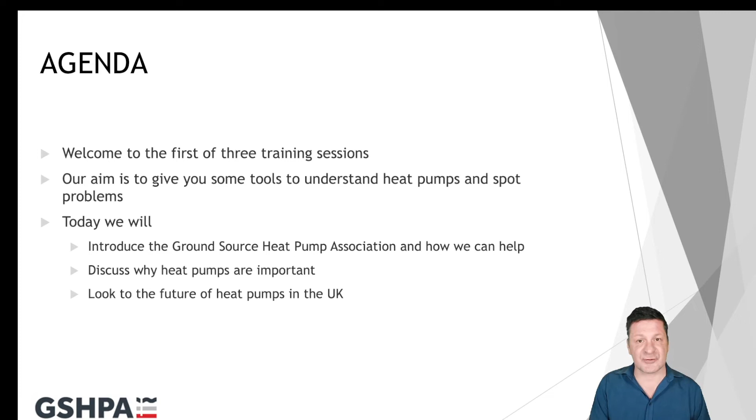So let's talk about the Ground Source Heat Pump Association first. It's a trade association which aims to further the aims of the industry, and we have several streams. We look at policy development, so we work with government to enhance policy to enhance the deployment of heat pumps in general and ground source heat pumps specifically. We provide training. This is part of the type of training we provide, but we also do sessions for consulting engineers, for practitioners and so on.

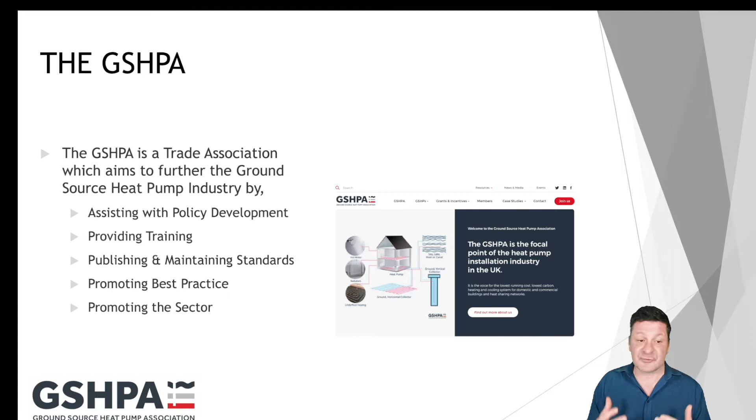We publish and maintain standards. We actually have in the UK some of the very best standards anywhere in the world on ground source in particular. We also work quite heavily with the microgeneration certification scheme and help to maintain and deploy their standards. We're here to promote best practice and of course promote the sector in general.

So to our members, we represent consultants, installers, manufacturers, drilling contractors, service providers who will maintain systems post-installation. We also represent training providers, suppliers, and we have a number of cross-trade association links and links with government departments.

Ground Source Heat Pump Association membership isn't a given. You have to be approved to be a member, and we can and do refuse membership for unsuitable applicants. So for example, if a member company has no experience in the sector, we'll suggest they go and get some experience before we can accept them as members of the Ground Source Heat Pump Association.

Similarly, membership can be revoked if members fail to adhere to technical and ethical standards. And we do revoke membership. It's unusual, but we do it. And we do give the opportunity for members to discuss with us the problems they're having in the marketplace before we resort to that. So it does give some kind of protection to your customers and to our members' customers if they are selecting members of the Ground Source Heat Pump Association to do their installation.

The other point I'd make is we have a thing called the technical panel, which I sit on. We provide expert opinions to both members and non-members. And the type of advice we provide is, for example, conflicting information. It's very common for a customer to receive 2 quotes and really not be able to compare the 2. And that might not be for any incorrect reason. It might be simply because the 2 companies have a different approach to providing a solution. And both of those approaches might be technically entirely reasonable.

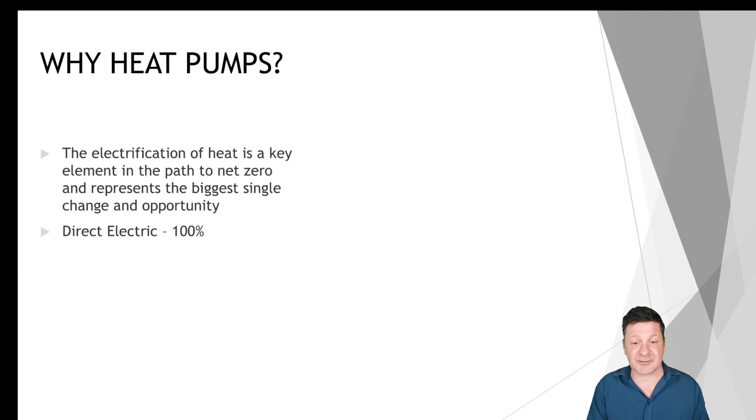The simplest and cheapest way of electrifying heat in terms of install cost is to go direct electric. With a direct electric system, that might be a panel heater or electric underfloor heating, you get 100% of the electrical energy consumed transferred into heat, but no more.

If you compare that with an air source heat pump, for every kilowatt of electrical energy you purchase, you get approximately 1 kilowatt of free heat from the atmosphere outside. So it's 200% efficient. For every kilowatt of electricity you buy, you get 2 kilowatts of heat put into the property. And then with a ground source heat pump, they can be much more efficient.

For every kilowatt of electrical energy you're buying, you can very easily get 4 kilowatts delivered into the property. That's the 1 kilowatt of electricity you buy, plus another 3 kilowatts of free heat from the ground in the case of ground source heat pumps.

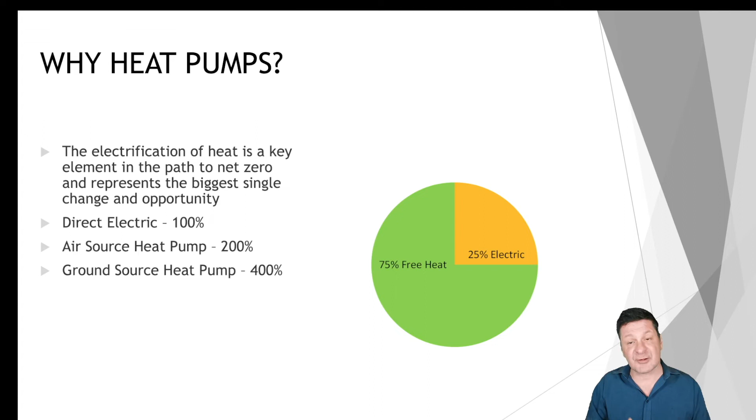In round numbers, the carbon emissions and run costs of ground source heat pumps are half that of an air source, which in turn are half that of a direct electric system. It's also important to point out that none of these systems consume any gas, so we are completely getting off gas in heating our homes and domestic hot water with any of these solutions.

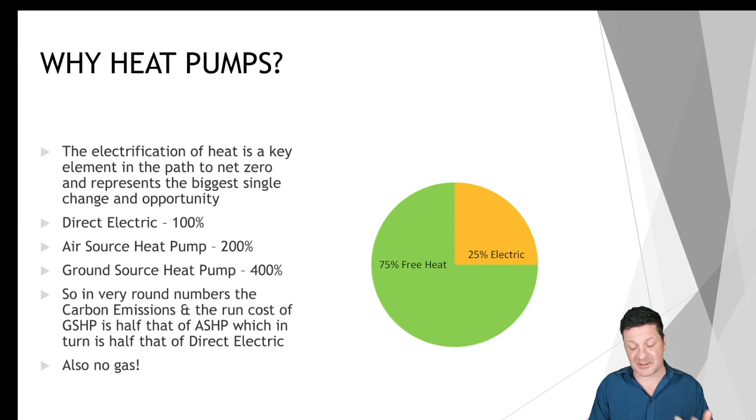So let's touch briefly on the future of heat pumps in the UK. The ambition was laid out 2 years ago to have over 600,000 heat pumps installed per year from 2028. That's a massive rise from when it was about 30,000 heat pumps going in.

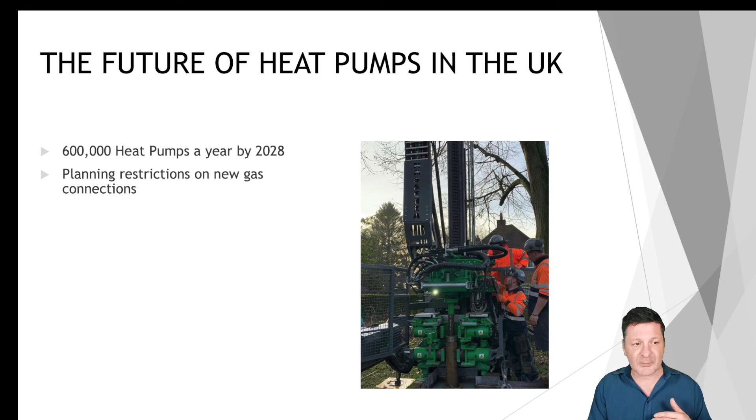This is being driven by planning restrictions, particularly on new gas connections. In our day-to-day business, developers will come to us and say, what's the feasibility of going heat pump on this development, because we're no longer able to connect to gas, or we see the end of gas coming, so we don't see it as an investable asset.

There are grants and incentives available, ranging from individual domestic properties to community-owned district networks, to larger heat networks, and through to commercial and public sector buildings. Very importantly, they also apply to social housing retrofit, which helps significantly with not only decarbonisation, but also alleviating fuel poverty in that market sector.

There are heat zones being declared. The consultation is not yet closed at the time I'm speaking to you on what heat zones look like, but it should give local authorities some kind of powers to declare heat zones in which they can involve some kind of compulsion to connect to a heat network as they roll out.

That then leads into ambient heat networks, one of the big buzz phrases in the marketplace at the moment. That's simply a network of pipes running at a very low temperature, which provides water into properties, which can then be used to heat the space and domestic hot water at very high efficiencies.

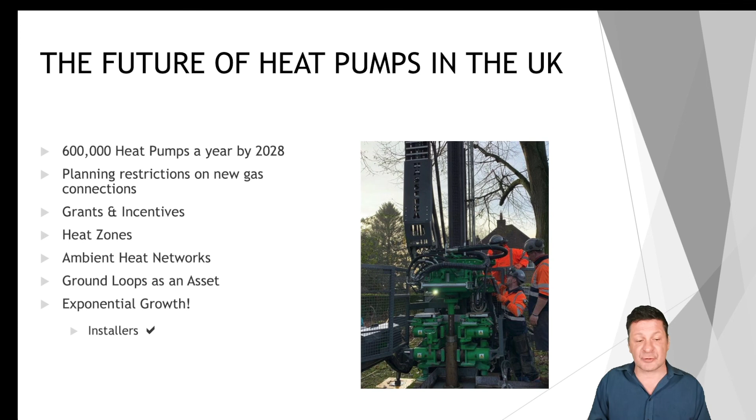So all this taken together, what we are expecting is exponential growth, and it's a good thing. We will see exponential growth in the installer base in this country. However, that's bound to cause problems.

One of those problems is imports of cheap, nasty products. That is particularly likely to happen, unfortunately, in the air source market, which is much more of a commoditised item than it is in the ground source market, where it's more of a systems approach, because you need a heat pump and something in the ground.

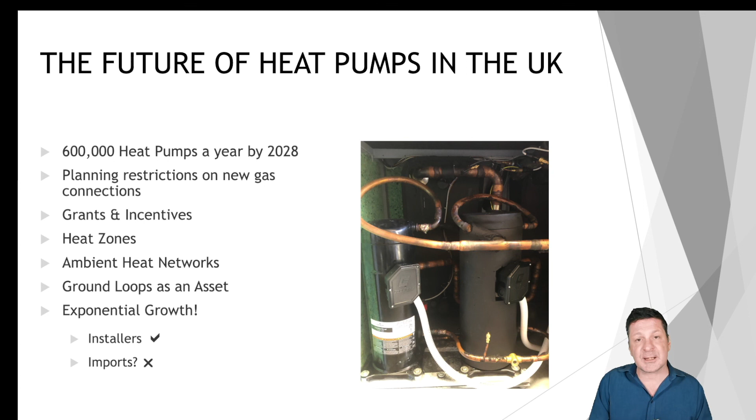There'll be more on the types of heat pumps, how they work and so on in future episodes. And I guess the worst of all scenarios is we see rogue traders.

This is a manifold external to a building of a ground source heat pump system, and you can see the frost on those pipes. Several things wrong with it. First of all, those pipes should be insulated, but secondly, this system, if you can see from the gauge, is running at about minus 9, which is way below the acceptable level for a ground source loop to be running at, which means that loop is simply way undersized.

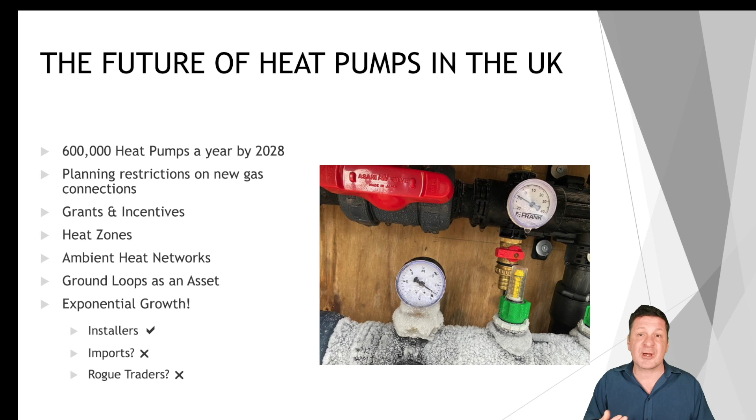It's something we'll talk about again in later sessions, as to how to spot these kind of problems before they happen.

So next time we're going to go into much more detail about heat pumps, and thank you very much indeed for your time.